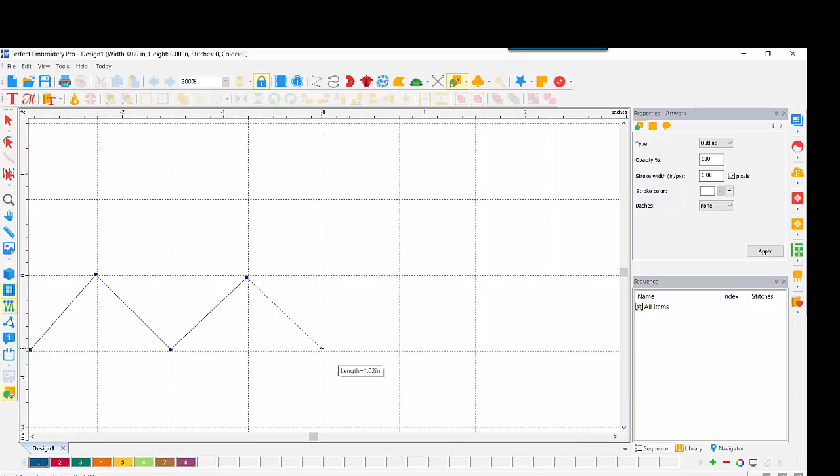With this being February, there are many Valentines and decorations that I've seen with scallops, which got me to thinking, how might we do this in Perfect Embroidery Pro? Certainly, we could bring up our grid, use our artwork tool, and create humps, if you will, that can be turned into our scallops. I'm simply clicking and dragging.

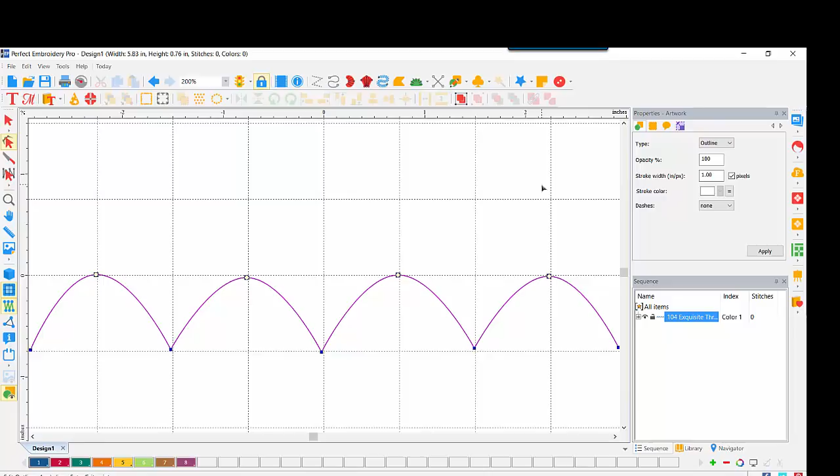Right-click to end. I'll use my shape tool and select all of the tops. Right-click, turn them to smooth, and this gives me the look of a scallop. However, this is rather limiting as the grid points might not be in the proper spot for the shape we are using. Instead, I'd like to show you the process using the Weld tool.

We have three shaping tools found when we right-click on two selected objects. The first that we see here, a blue rectangle and a red circle starting out, those are our shapes. If we select both of them and do a weld, it's going to merge two selected objects together, as you see here in the blue.

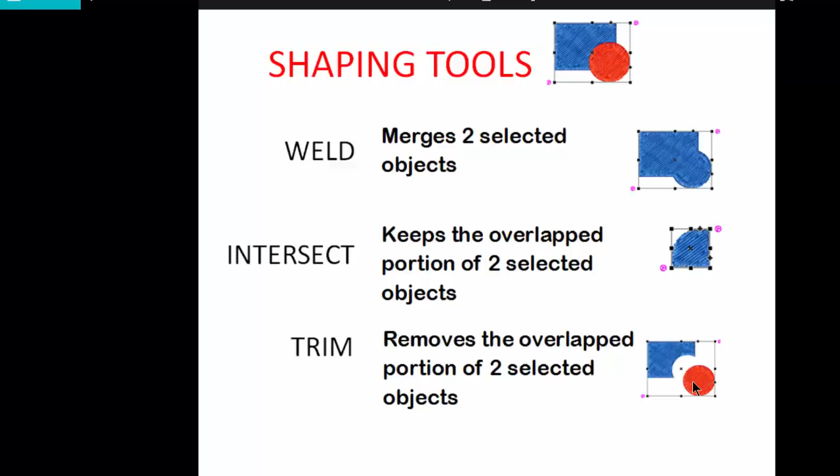If we use the shaping tool called Intersect with those two shapes, it keeps the overlapped portion of the two selected objects. In this case, that inner quadrant of the circle right up here. If we use the Trim shaping tool, it is going to remove the overlapped portion of the two selected objects. You can see in this picture I've dragged the circle away so that we can see the part that has been trimmed. Let's set the stage here with some shapes on the screen.

We're going to create a perfect circle. Come up here to my artwork tool, choose the ellipse. I'm going to hold down the control key on the keyboard as I drag to give me a perfect circle. Selecting it, I want to check out the size. I actually wanted a 0.4, so that was pretty good on my part.

I need a number of them, and yes, I could copy paste, but let me remind you of your repeat tool. With it selected, I'm going to come up here to repeat, click on that. I know that I want 1 across and 5 down. The other thing that I'm going to do here is to use the vertical distance and set this at a negative 0.01. I need these circles to be slightly overlapping. I'll go ahead and do an apply, and I see this overlapping right here, which is what I need. I'll go ahead and OK, and here are my 5 circles brought to screen.

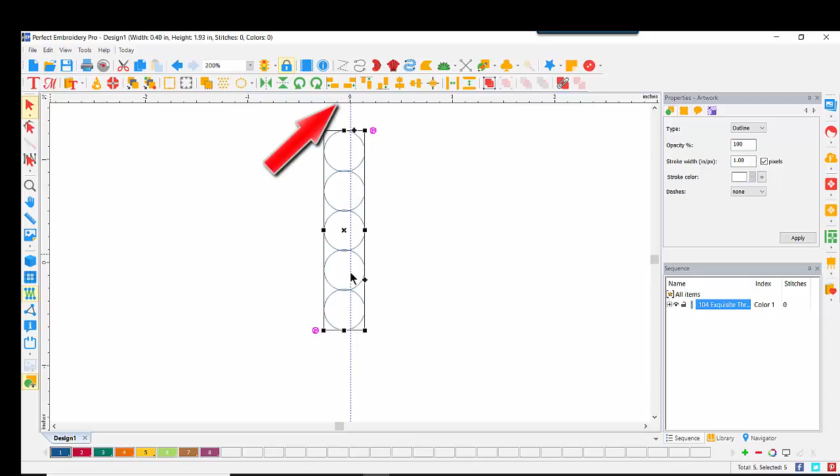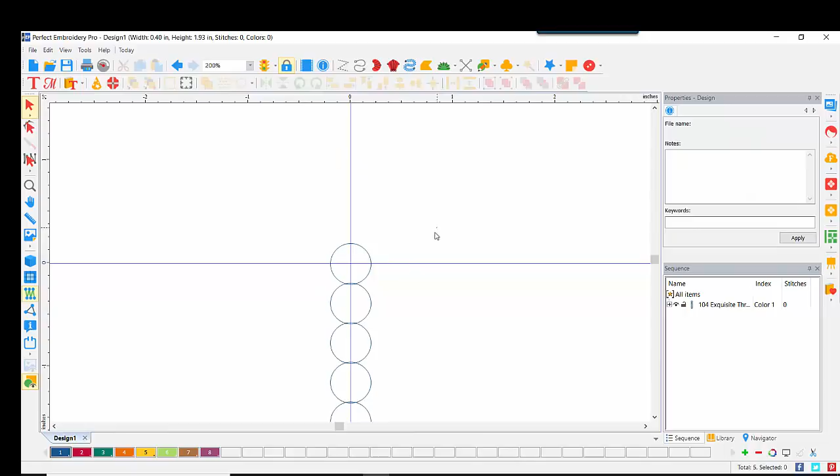The other thing I'm going to do is to come over here to the ruler and click and drag and set a guideline at 0. I'm then going to come to the top ruler, click within the ruler, and drag down another guideline set at 0. My 5 circles are still selected. I'm going to click on those and drag and place them right on the center of that line. I can check my work because each of these circles are still individual circles and artwork, and you see that I have placed the center X in the center of those crosshairs.

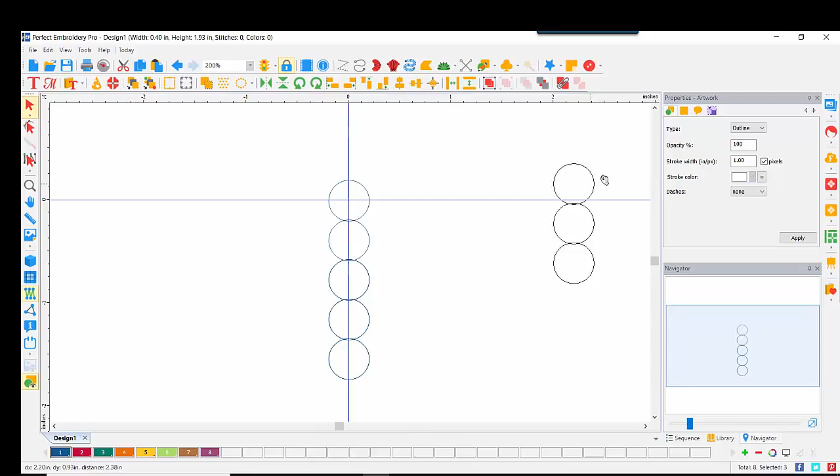Before I move on, I'll come over here and turn the Navigator on, move my blue box down. I want to select the bottom 3 circles, do a copy, paste. I'll drag those over here out of the way. I'll turn those red for right now so that they're a different color. If I need to choose any of my blue circles, I've made it a little easier for myself to do that. And now we're going to start the weld process.

You may remember that to do a weld, we have to have 2 selected objects, not 1, and not 3 or 4, and not all of them. We have to weld 2 objects together. So I'll click on the first item, hold my control key down, click on the second circle, right-click within, come down to Shaping, which gives me the 3 shaping tools. I'll choose Weld, and you can see right here that they have welded together.

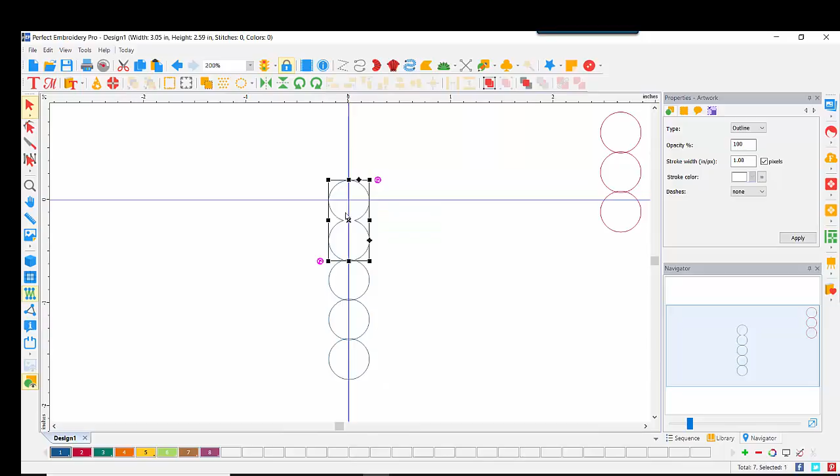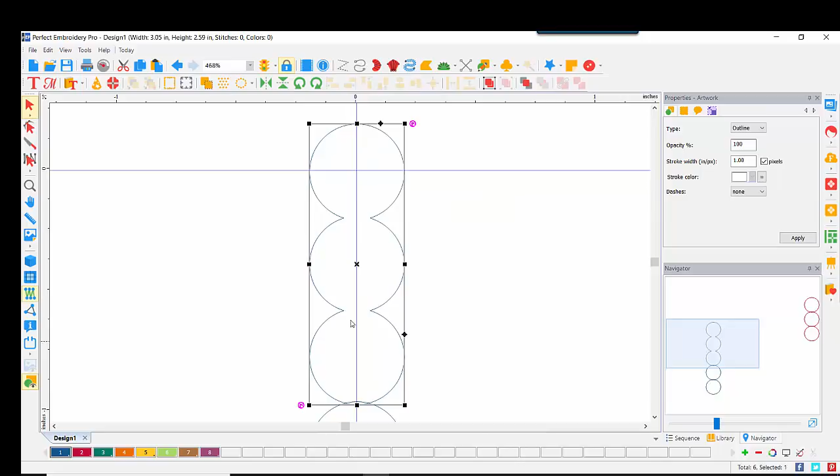If I scroll up a little bit with our Navigator, you can see that those 2 now make 1 unit. All right, that 1 unit is selected. I'll hold down my control key and select my 3rd circle, right-click, Shaping, Weld. Same thing has happened. I might scoot out just a little bit here on my Navigator.

With this selected, I will hold down Control, select my next circle, right-click, Shaping, Weld. Remember, once this is welded together, it's considered one object. So all I need to do then is hold down Control, select the next object, right-click, Shaping, Weld. All of my 5 circles have now been welded together.

I'm now going to click and drag another guideline to come down to the center of this bottom circle. I can tell that it is in the center. The reason I'm doing that is to help with my square. We're going to create scallops around a square, so let's get a rectangle artwork. Once again, if I hold down my Control key while I'm dragging, I'm going to get a perfect shape size, in this case a square.

I'll start up here at the corner of my guidelines, click and drag, and I'm simply dragging down to the bottom guideline. Because I had that Control key held, I know that this is a perfect size square. I'll select it, and I'm going to change the color to green. I use my guidelines a lot to help with accuracy of placement. They're very easy to drag down off the ruler, and you'll see in a moment how very easy they are to remove off of your screen.

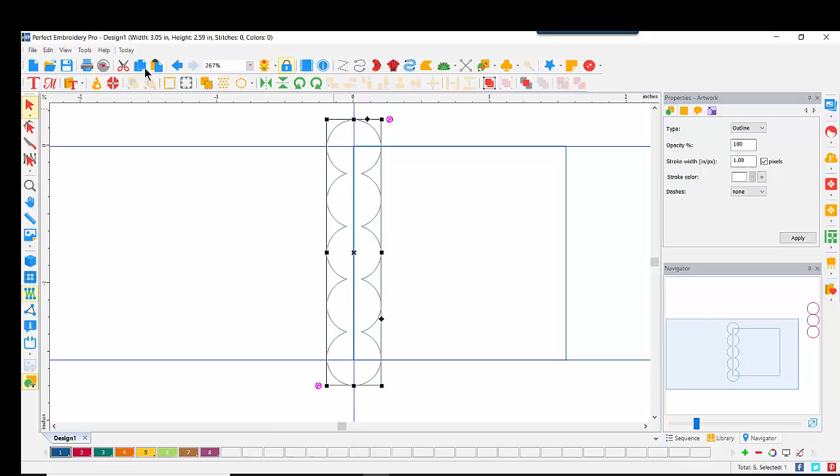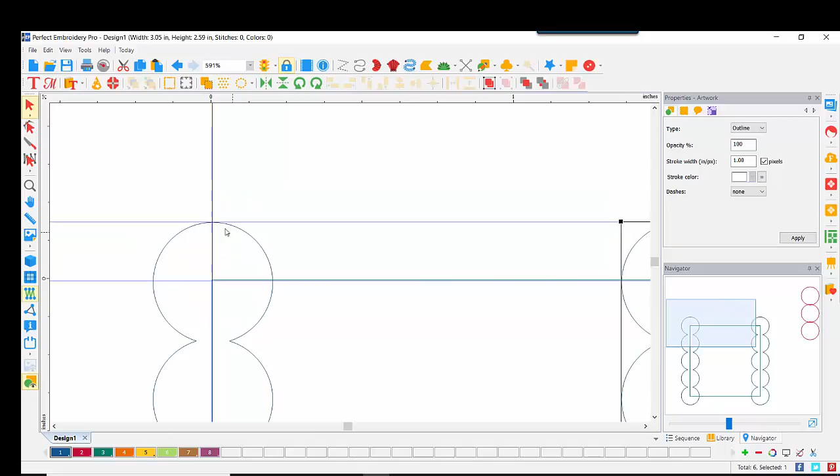My square is selected. Now what I want to do is to select the welded 5 circles, do a copy, paste. I'm going to click and drag and place those over to the side. If I want a little help with placement, I can go ahead and click and drag down another guideline that touches the top of this circle right here. If we need to scroll in a little closer using our navigator, I can see that it touches, so all I need to do then is to make sure that this touches as well, and it does.

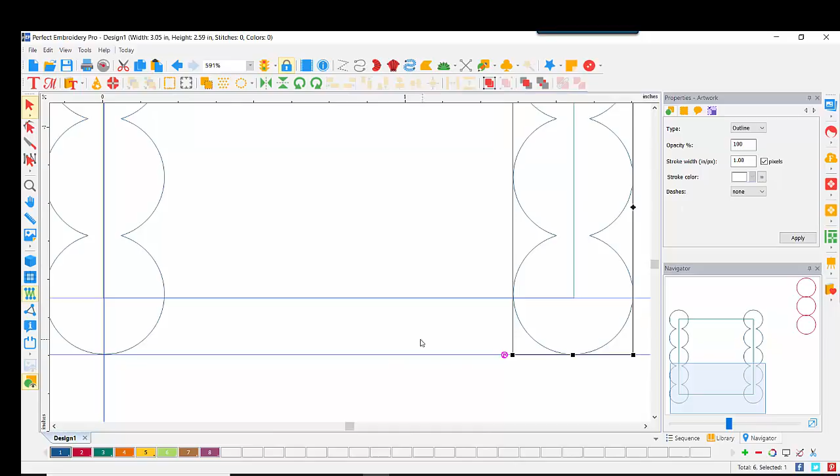Looking to my center point, I'll move down, and if I wanted, I could go ahead and click and drag down another guideline at the bottom to make sure that placement is as it should be. So that looks good. Remember, on our navigator, we can come over here to Fit and click on that, and I will see the entire screen. If I want to make sure they're in perfect placement across from each other, I could also hold down Control and select the second one, come up here to our vertical center align, and click on that.

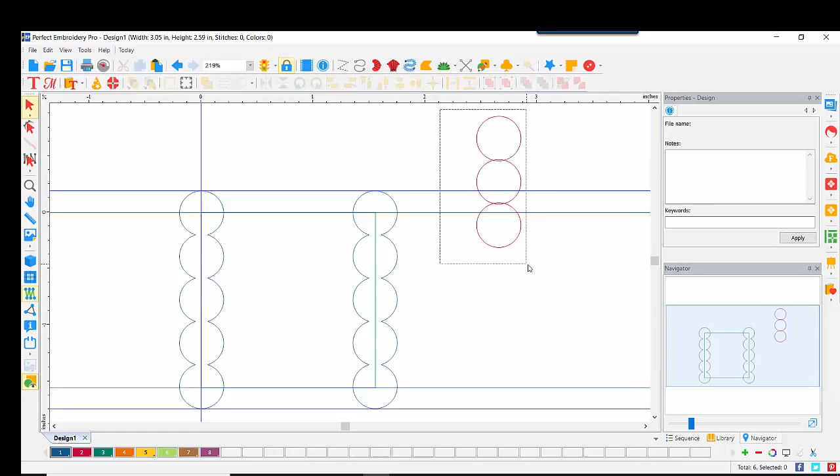Let me now select my 3 circles I've set aside. Come up here to rotate. I'll click once, twice to rotate into a horizontal position. I'm going to place those right in here. And do you see the beauty of that guideline? I have given myself an option as to making it very easy to make sure that those circles are aligned with the other 2 side ones.

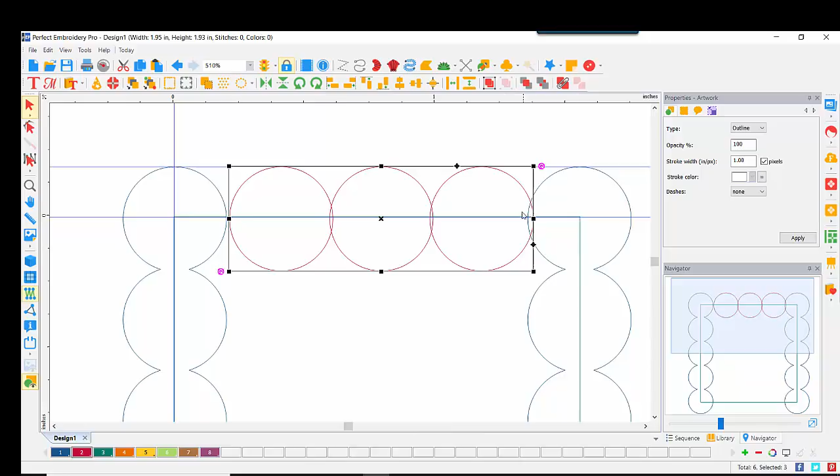The other thing I want to make sure, can you see right here? I need to make sure that they are overlapped. This one on the right hand side is, but this one on the left hand is not. So let me take that and move that over just a little bit and see if they are big enough to overlap. If not, I can grab that side arrow and just move it just a smidge. Remember, they have to be overlapped or at least touching to be able to weld.

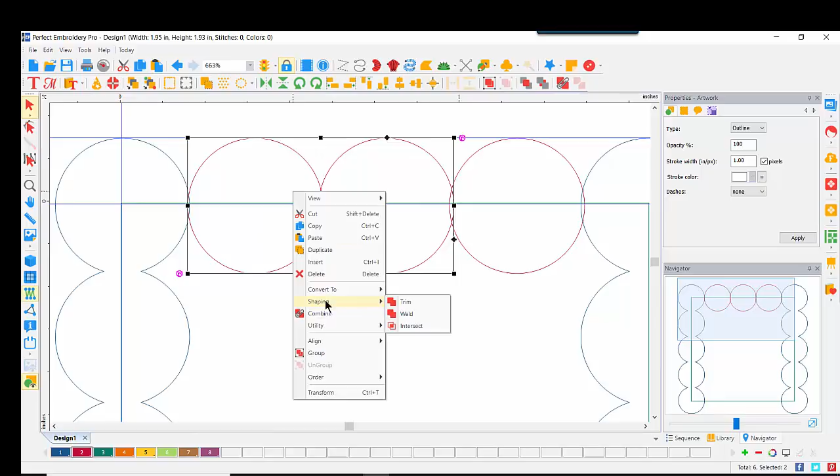Once again, let's start the weld process. I'll click on the first one, hold down Control, click on the second, right-click, Shaping, Weld. This becomes one object. Hold down my Control key, select that third one, right-click, Shaping, Weld. All 3 of those are now welded together into one unit. Let me back out here on our navigator.

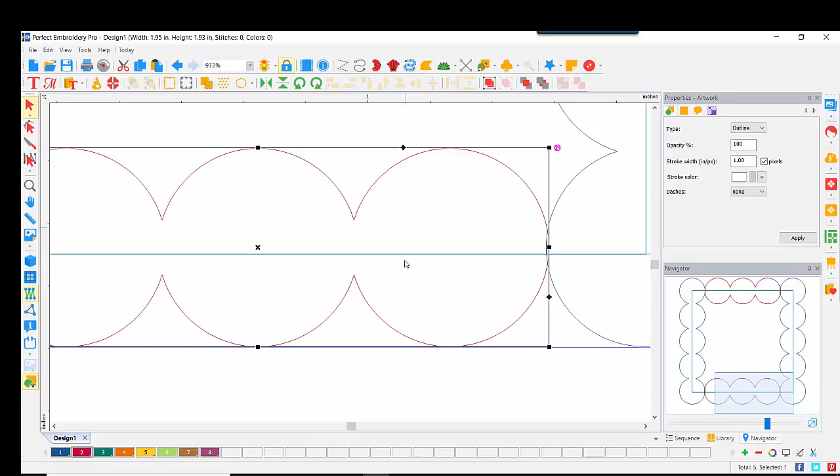I'm going to do a copy-paste on that top circles, drag those down, and once again, because of that guideline, I've given myself a nice way to guarantee placement. Just touching that bottom line, I've overlapped here just a little bit, and if I need to see on that side, I'm overlapped here. So now what we want to do, this is one unit. Remember, the sides are one unit and the top.

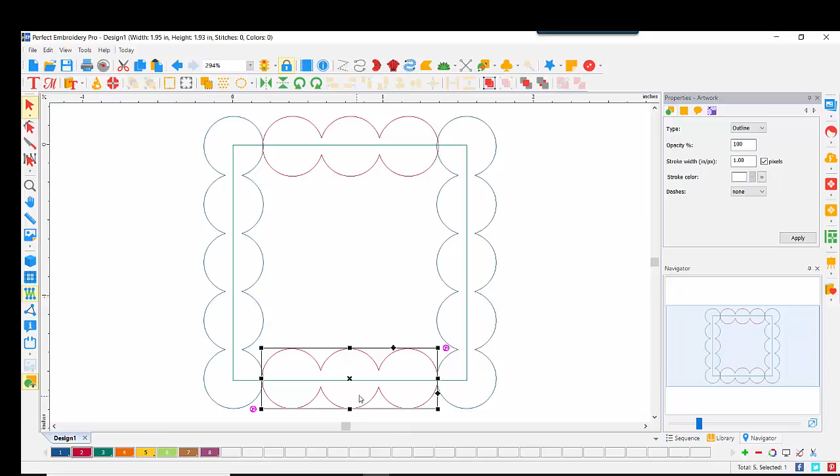To help you see this just a little easier, let me come over here to my ruler, right-click in ruler, remove those guidelines. We just have our square and then the 2 side pieces and the top and bottom. The bottom is selected. I'll hold down Control key and choose the right side. I'll do a right-click, Shaping, Weld. This is all now one unit.

If I select the middle, hold down Control and click the outside, right-click, Shaping, Weld, I now have one unit. You'll notice too that the colors go away. It will always take the color of the major unit that you are welding. With this now one unit, the only one that is left is this one right here. So I'll hold down Control, choose my outside, right-click, Shaping, and Weld. We now have all of our circles welded together and our inside square. Before I go any further, I'm going to save this.

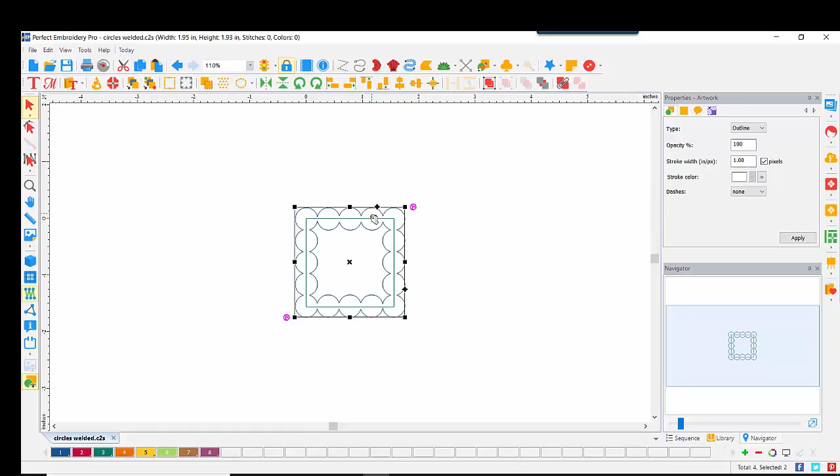So we'll do a File, come down to Save As, make sure it's in the folder that you want. We'll give it a name, Circles Welded, and we'll save that just in case anything needs to be changed from this point forward. I'm going to back out just a little bit here because I'm going to click and drag and do a copy paste of all of these. I'll use my Navigator to scroll out just a little bit so I can see them nicer.

And I want to show you two options that you have for your scallops. We have both of these selected. If you're not sure, come back over to Sequence and we see that we have the circles that are welded and the square that we have drawn. I'll make that red. If I do a right click, shaping, weld, the same thing we've been doing all along, you can see that it merges those two objects into one and we have outside scallops.

If you want inside scallops, let's select both of those items, right click, shaping, and this time we're going to choose intersect. Remember that intersect will keep the overlapped portion of both of those selected objects. Here with the intersect, if I select it and right click, convert to complex fill, you can see that it will fill in those scallops on the inside. I'll go ahead and bump my density down just a little bit.

If I were to select this one, remember this is what we did with weld, and I do a right click, convert to complex fill, it fills the entire unit. It does have scallops on the outside if that's the look that you're after. I'll do an undo, because what if we wanted the scallops to look just like the intersected one, where just the scallops are filled in?

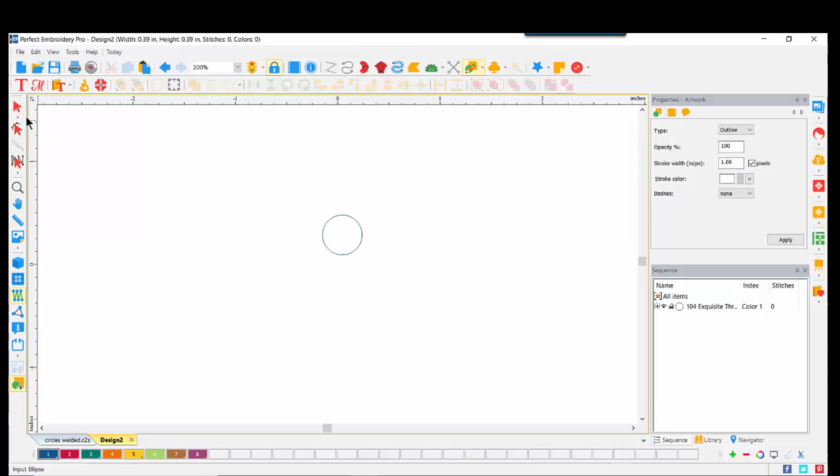Now let's up our game a bit with a more intricate shape. We'll use a heart. Clean screen. We're going to do the same procedure. I'm going to start with my artwork, ellipse, hold Control down and draw a circle. Select it so I can see what size it is over here under Properties. I do want this circle to be a 0.5, so I'll up that just a bit. Apply it.

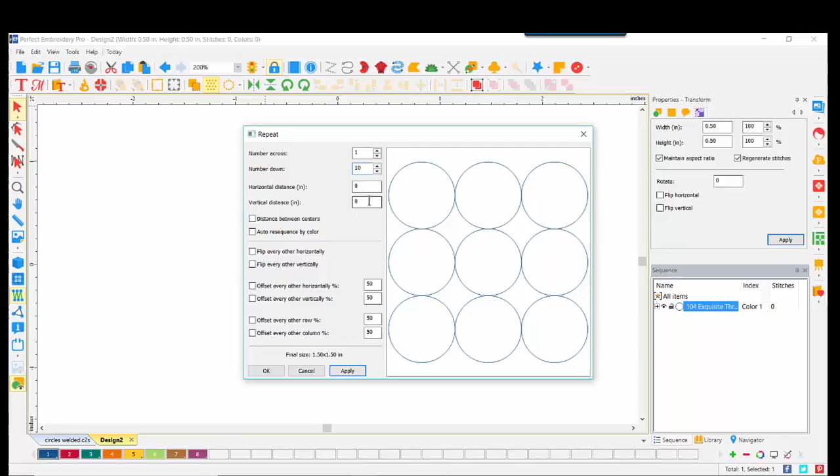We're going to go back into our repeat key. This time I want 1 across and 10 down. I don't need to do the vertical distance overlap in this case because we're going to be placing those circles individually. Here I have 10 of them. I'll go ahead and OK. This was really just a very fast way for me to get 10 even circles without doing a copy paste.

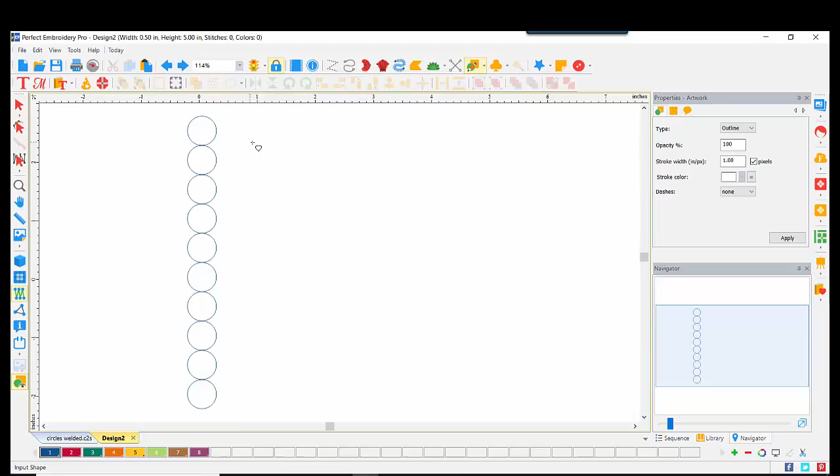Let's come up to our artwork tool, get our heart. I'm going to hold down the Control key and click and drag. That will give me a perfectly shaped heart. I will select it. I'm going to right click on red to change the color. I also need to come over here to transform and set that size to be a 2.8. I'll go ahead and apply. Set that heart in the center of the screen. I'll go ahead and do a right click on the ruler, do a center origin.

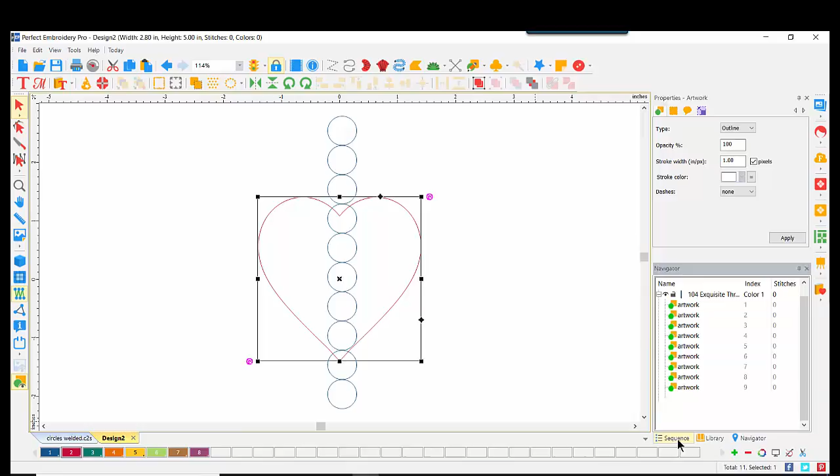I will switch over to sequence view, take those blue circles out of the middle of this heart for just a moment, and then I am going to drag my guidelines down from the ruler, one vertical, one horizontal, and that gives me the center portion of the heart. Remember, these circles are individual. I'm going to click and drag one to place it at that point, and then click and drag one to place it at the bottom point, just for reference. I'm not really concerned right now as to the perfect placement of those circles.

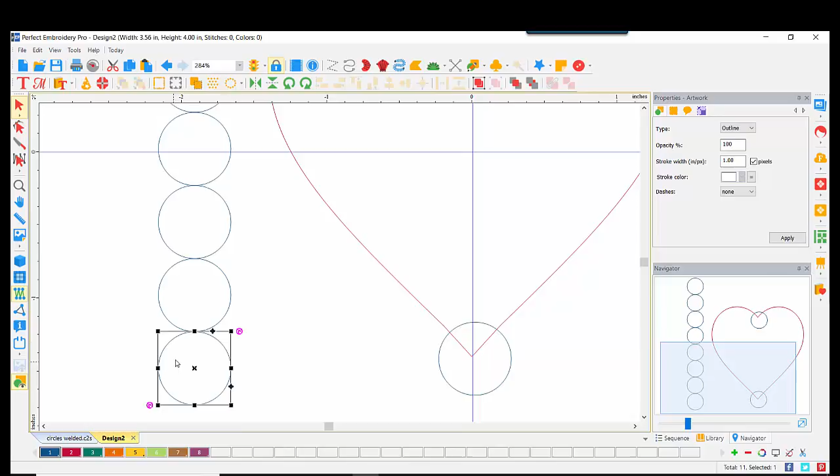Let's come back over to Navigator, bring me back into that screen. I'm going to slide in just a little bit so I can see the circles and my heart a little better. Here's a trick. If we select one of the circles, remember that they are individual, they are not grouped.

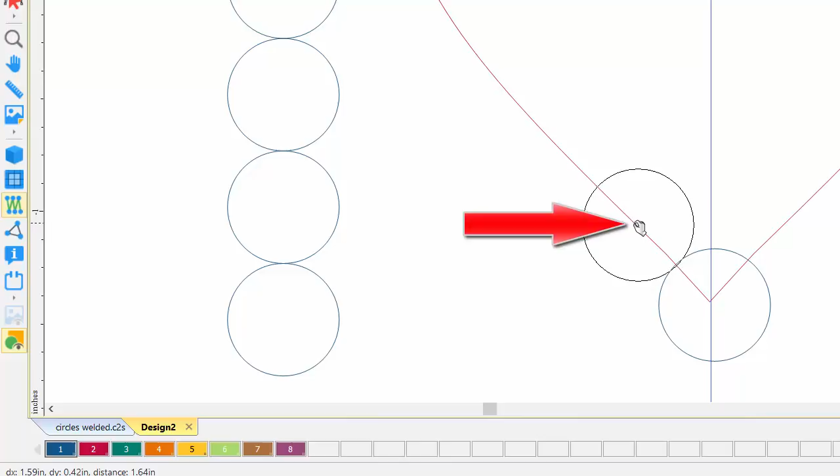You notice that with any selected object, the X always gives you the center mark of that item. I put my hand right on that X, drag my circle over, knowing that that's the center X. If I position my hand on that red line and let go, I have put the center of that circle on the red line of the heart.

So it's very easy for me to place these circles. I'll do the second one, select it first so I can see my X, put my hand on the X, drag over. I'm looking at two things here: first, to make sure I overlap that circle just a little bit, and then that the hand is on the red line of the heart, and I let go.

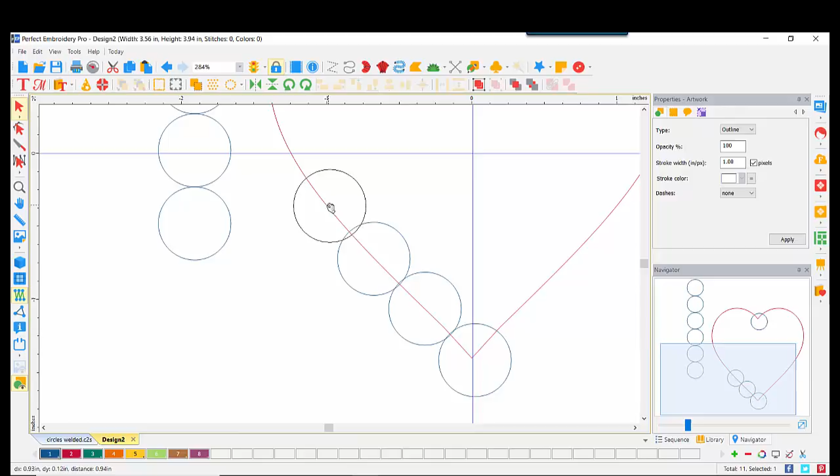That looks good. I'll do the same, select, get that center portion, drag over, overlapping just a hair, watching my hand on that red line. You can use the Navigator to move up, select the next one, get that center point, position it ever so, and I simply keep doing that with my circles.

You can see this is not difficult if I'm using the tools that PEP gives me. Move that over just a hair. I still am overlapped. I want that right on the line there. I'll select the next one, get that center point, overlap them, bring my hand on that red line and drop that into position.

I will select it, get my center X, drag that X right back over on the red line, overlapping just a little bit, and then here is my last one, overlapping just a little bit, getting it on that red line, and there I have the side of the heart.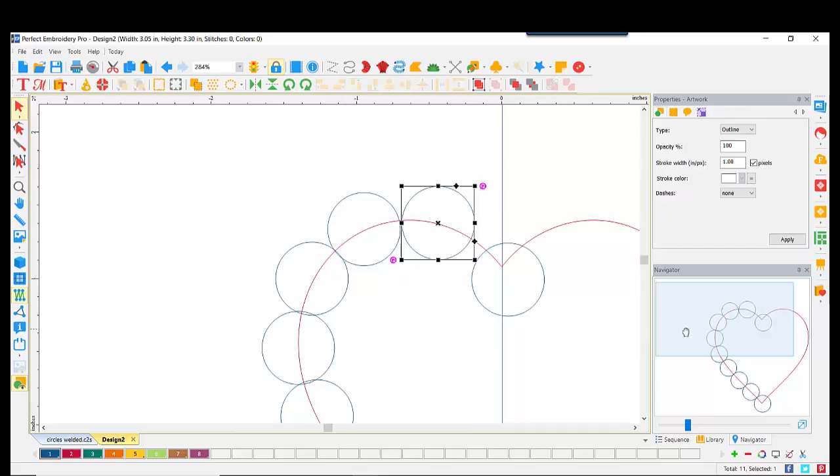I'll drag that out just a little bit, come down here, drag this one out just a little bit, because what we're going to do, if I like the placement of all of these - do you see where that's not overlapped? So I need to move that over again before I go through my procedure.

Because the next thing we're going to do is to weld them. What I'm doing now is taking a look and making sure all of my circles on that heart are overlapped, and they are. So we begin our weld procedure.

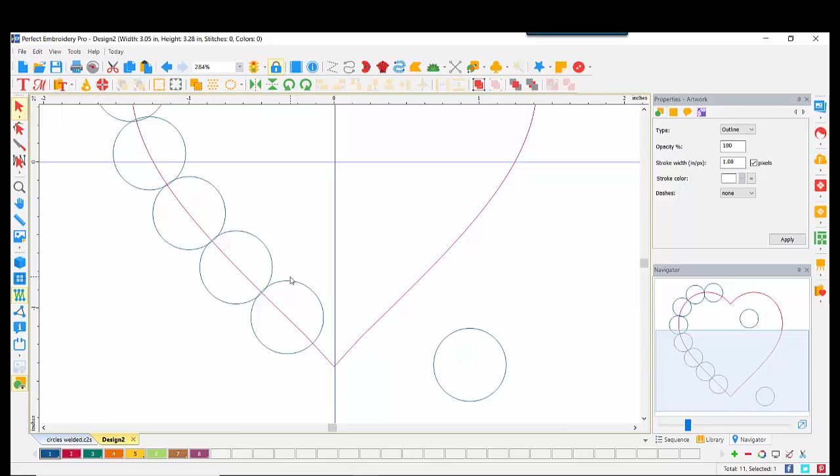I select my first item, hold down Control, choose the second, right click, shaping, weld. This is now one unit. Selected, hold down Control, get the next object, right click, shaping, weld. Move up a little bit here and you can see that all those are being welded.

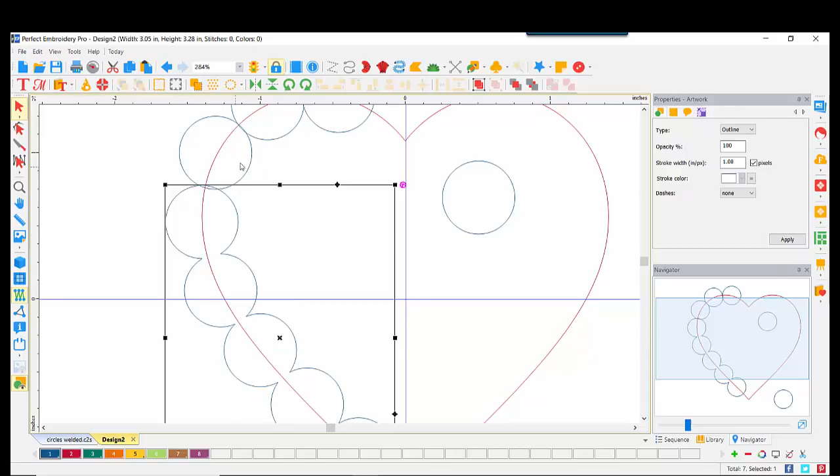Control key, select, right click, shaping, weld. It's the same procedure that we're going to use all along. The right click brings up the shaping. This is now one unit. Holding Control down, I get that next one. Right click, shaping, weld, and so forth.

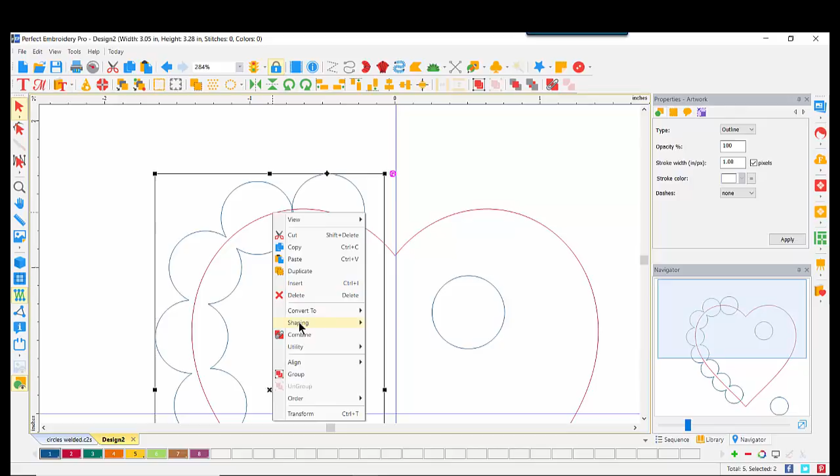I like this Navigator. It's very easy for me to move around without doing a couple of clicks and moving buttons and so forth. Right click, shaping, weld, and then finally the last one, right click, shaping, weld. All of that side now has been welded.

We know that these are going to be the half scallops when we're finished. Let me back out and see the whole of the design. This one item is now selected.

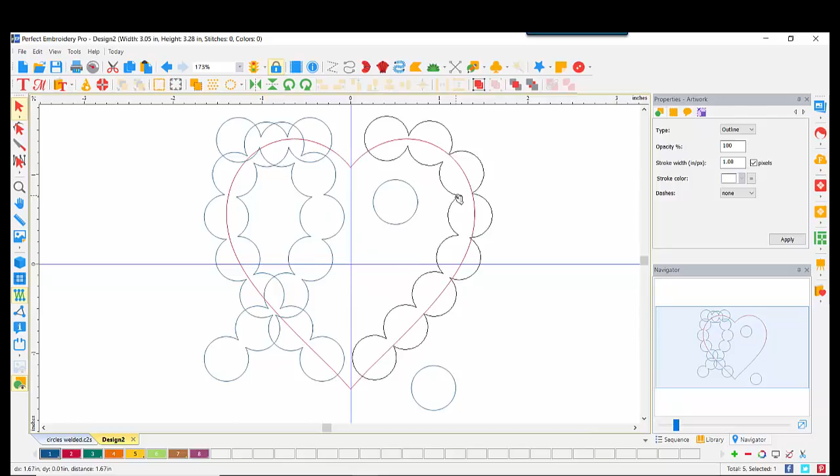Let's do a copy, paste. It's right on top of each other. I'm now going to use my flip horizontal to get the mirror image and then drag that over onto the design and drop that sort of where I think it belongs.

Once again, I'm going to use the tools that I have, coming up to the ruler, dragging down that guideline, putting it at the very top here of this circle. What that does is allows me to get right in. You can see that I'm a little high. I'll drag that down so they match.

I'm also judging the distance from this circle to this one. I know these have to be in the middle, so I can move over just a little bit, perhaps watching that line up at the top. Then if I want to check here, I simply drag the Navigator down to the bottom and drag another guideline down from that ruler, and I see that I'm just a hair off, so I'll come in closer.

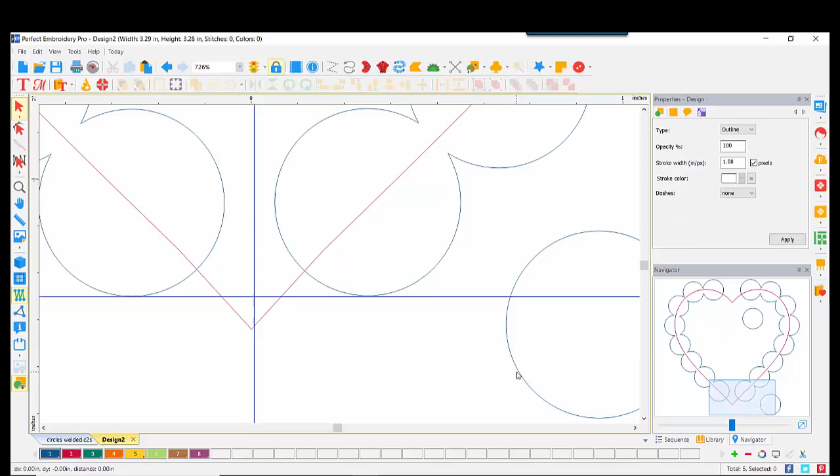Now what I can do is take this bottom circle, drag it over until I'm happy with the shape. I want it to overlap just a hair. And if you're off a bit, either on these two scallops matching or down here at the bottom, not to worry. You can see my center is off just a hair.

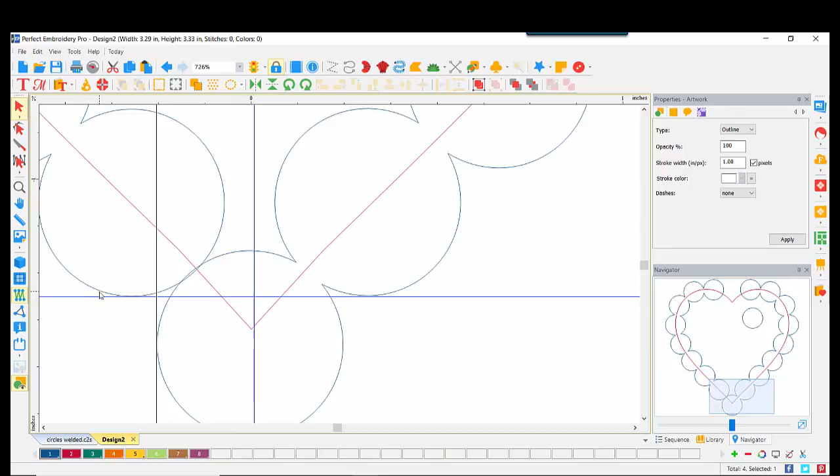Remember, this is scalloped, so if there's a slight difference between them, no one will notice when it stitches out. I have my bottom center selected. I'll hold down control and choose the right hand side, right click, shaping, weld, and I can see that now that bottom circle is part of it.

While I'm here, this is selected. I'll hold control down and choose the other side, right click, shaping, weld, and now both of those sides have been welded to the bottom. Let's go up and do the same for the top. I need to grab this circle and drag it into position. Remember, they need to be overlapping just a hair on both sides for this weld to work. I'm off just a hair, but I'm not going to worry about that.

Let me come out just a little bit so I can see, making sure how many I have selected. I have just this one selected, holding control down. Remember now that both sides are all welded together, that is just one piece. So I can select on that, right click, shaping, weld.

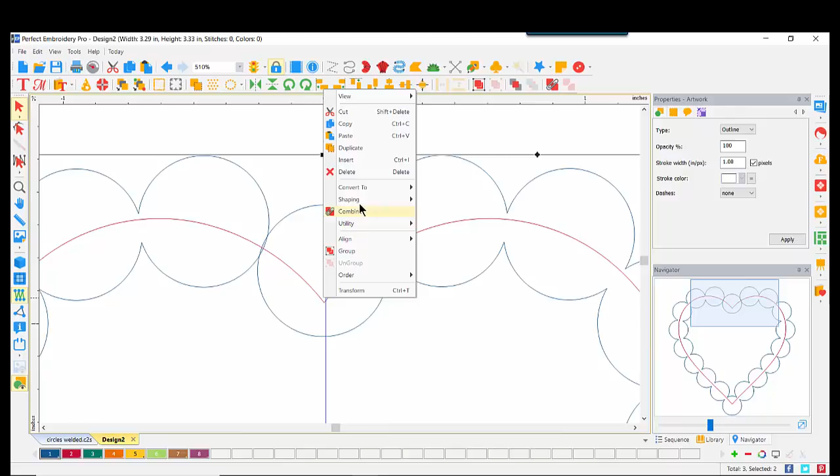We'll back out. Come over here to our ruler, right click on the ruler, remove the guidelines so you can see what we have. I'll back out just a little bit more to 100%.

Both items are selected. I'm going to do a copy paste just to refresh on what we did earlier. Let's move this one over here just a little bit so we can see what we're doing. Both of these items selected, we'll click and drag these items to get our scallop. We do a right click, shaping, weld, and we have the scallops on the outside.

Because I know I'm going to make those scallops on the inside, this red heart is the size that I want. I certainly could draw another one and make it a 2.8, but I'm going to click on just the heart, come over to sequence, and notice I have just the heart. Do a copy, paste, drag that second one over here. I can then select both of those items and do a combine.

We do a right click, convert to complex fill. We have scallops on the outside. While I'm thinking about it, I'll go ahead and bump my density down just a bit. For this other, remember, if we select both, right click, shaping, but this time do intersect.

That's what puts the scallops on the inside. We can do a right click, convert to complex fill. So there you have a weld feature and an intersect, depending if you want the scallops on the outside or the inside. Just for fun, we could select both of those and put them together, and you have that kind of heart. Very pretty. I'll do an undo because we're going to use that red heart in just a moment.

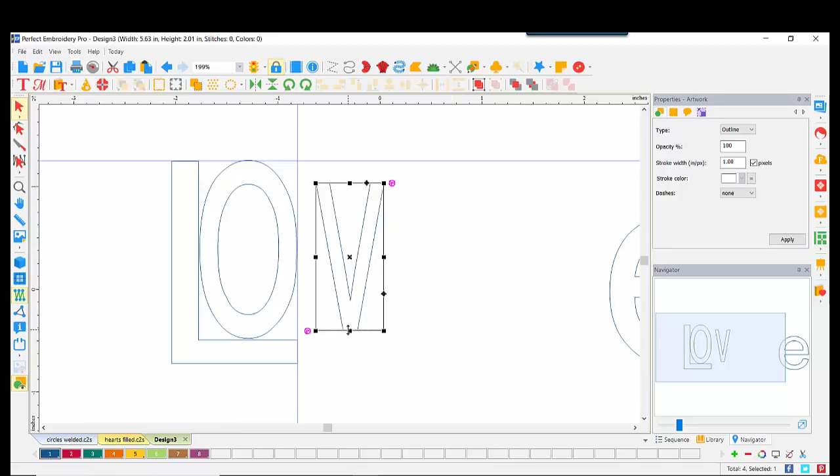I'm going to bring the V in. I know first of all that it needs to be narrower and probably a little shorter, so I'll do some of that manipulation before I bring it over. I'm also making sure that each letter overlaps.

So here we have, before I go any further, let me make sure that O is overlapping just a hair on the sides and bottom to that L. Now with my V, I know that I want it shorter and maybe a little narrower so we get the tops of those V's in.

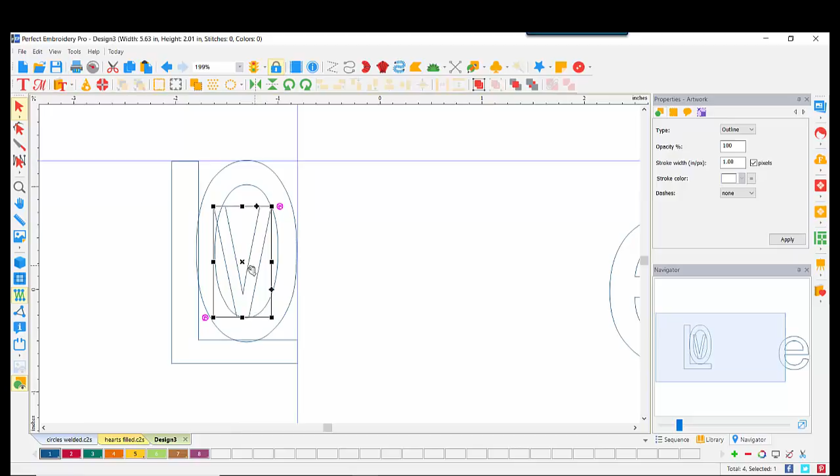And I'm making sure that it's overlapped here at the bottom just a little bit. Let's see what it looks like if I bring it taller. I have a little overlap there on both sides and down at the bottom, so I'm good.

Let's grab that E. This one I might want to scoot in a little closer. I know that this guy has to be a lot smaller, so I will size that proportionately. Bring him over. He's going to sit right inside the top of that. I'm going to size him a little larger now, and there's no right or wrong here.

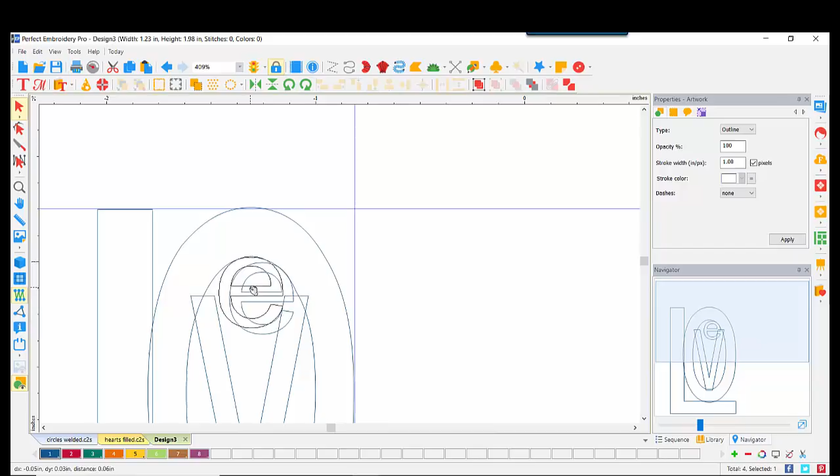I'm just playing, getting those handles, sizing as I need to overlap the top. Maybe make it a little taller, and I know that it's overlapping here and just here by the side. I may or may not want that to overlap because I might want that to define the edge of the E.

With each of them in there, I'm taking a look again, overlap here, here, here, all with the top of the V and the E. I can go ahead and right click on my ruler to remove those guidelines.

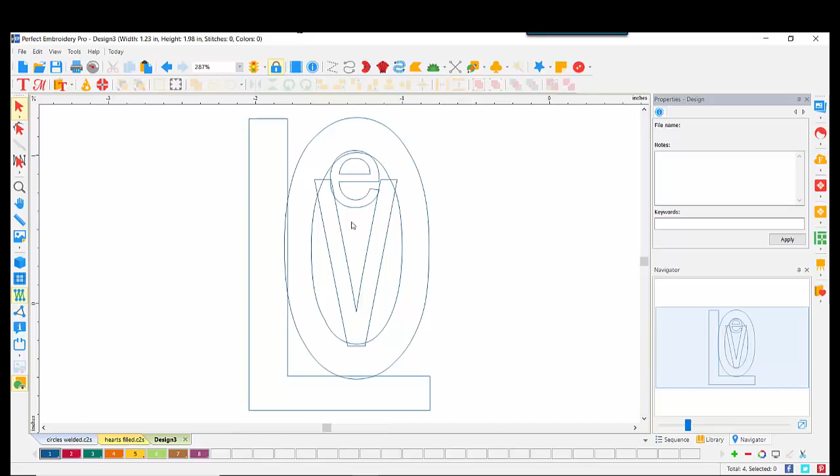And now I'm going to do the weld process. So we'll take the E, hold the control down, choose the V, right click, shaping weld. We see that that's now one unit. Hold my control key down, select the O, right click, shaping weld. That's one unit. And finally then control key, select the L, right click, shaping weld. My word love is all one unit.

I now can do a right click to do a convert to a complex fill. I'll bump that down to a 3 density, come over here and right click on my red, turn on my realistic view, and here we have it set in the tatami.

We could leave that if you like the look of that. I'm going to come over here and play. My two favorites are either brick, I like that, or sometimes I play with corn as well, and I think I like that better. So let's back out just to be maybe 100%, and we can see our word.

This is all one unit. If we want to, we can do a right click, come down to utility, and ask it to create border. Remember the difference between border and outline? Border is also going to give me the lines on the inside of the lettering as well.

Let me change that to a different color so you can see. We'll scroll in just a little bit so you can see that on the inside of all those letters I also have that run stitch. If I had chosen outline, we would only have it on the outside and not on the inside of these letters. All right, here's our word.

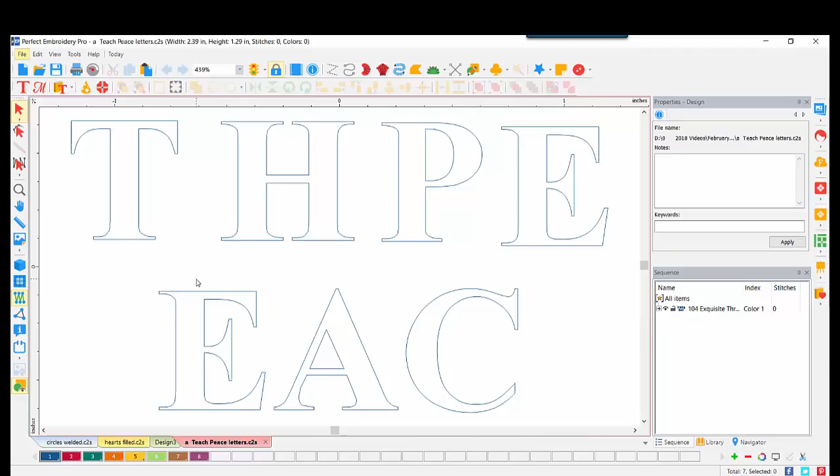We could stop here, but there's a little something for those of you that want a bit more of a challenge, and it's this idea, Teach Peace. We're going to do an open. I already have the letters ready for us on screen to use. These letters were created using your file, import true type text. They are Times New Roman bold. We're going to back out on our screen here to about 200%.

We need to create a rectangle. So I'll use my artwork tool, rectangle, and I will create and drag. Not concerned yet for the size. I'm going to change that in a moment. I am going to do a right click though on the red so we can see both of those things separately. I'll move this down just a little bit. Coming over here to our properties in transform, I want that rectangle to be a 4.5 wide. I'll do an apply. Here's my rectangle. I'm also going to ask it to be center origin.

I'll do a click and drag, positioning those outside of the rectangle for right now. We now want to select these three letters. I'm going to come over to my size and make them 1 inch high. I'll go ahead and apply that. I'm going to drag those into the center. If I want to do this quickly, I can just bring over my center mark, get my X and drag that over, and now I know that they are in the middle. I have these again at 1 inch high, and I'm going to play with the rectangle to give us a slightly different shape. My rectangle is selected.

Come over to the shape tool. I have my points right here on center. I'm going to right click and add a point at that mark. Come down here, right click, add a point at that center mark, and then I'm going to click and drag so that it matches the top of the letter A. You can see what I've done here with this rectangle. I've simply given us an envelope shape. Does this look familiar to you? We have played with this before when we were working with our text tools. However, since I want to reshape the letters themselves, I need the letters to be artwork.

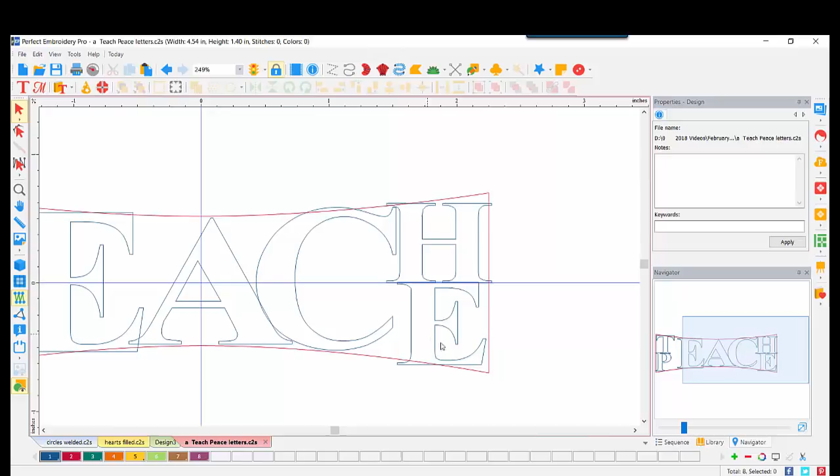So now that I have all of my letters touching and placed, it is now that I'm going to do the distortion of the letters, filling out this rectangle. So we'll select it. I'm going to use my shape key, take those points, and you can see what I'm doing here now. I'm going to, oops, I've grabbed the wrong one there. I'm going to make those points lay right on the line here.

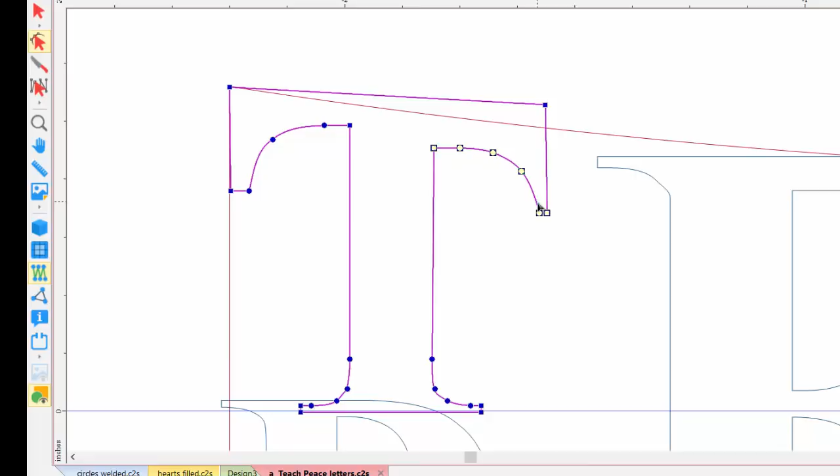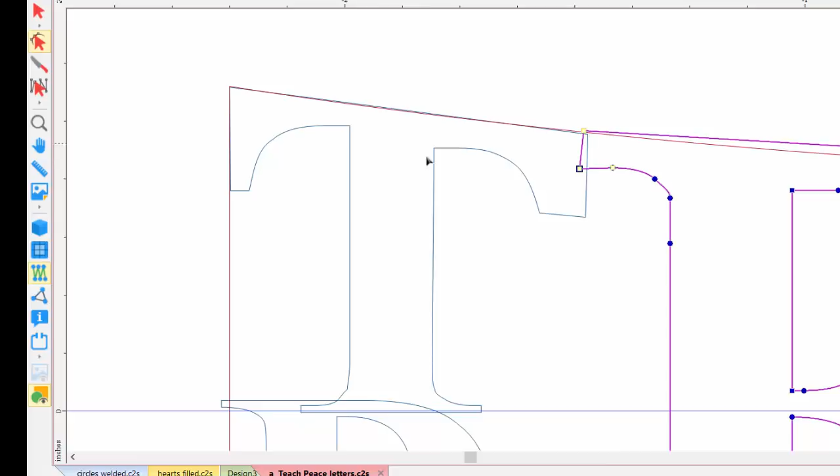And what I can do with this T, I'm going to grab just those lower ones and drag that down just a bit. Because I have selected all of that, I am keeping the shape of the T so that I can bring that T all the way over here and maybe make it a little wider so that when I play with my E, I can drag him over so they touch. You see what I have done there? Okay, I'm making each letter overlap, and I'm trying to keep the proportion of the letter itself.

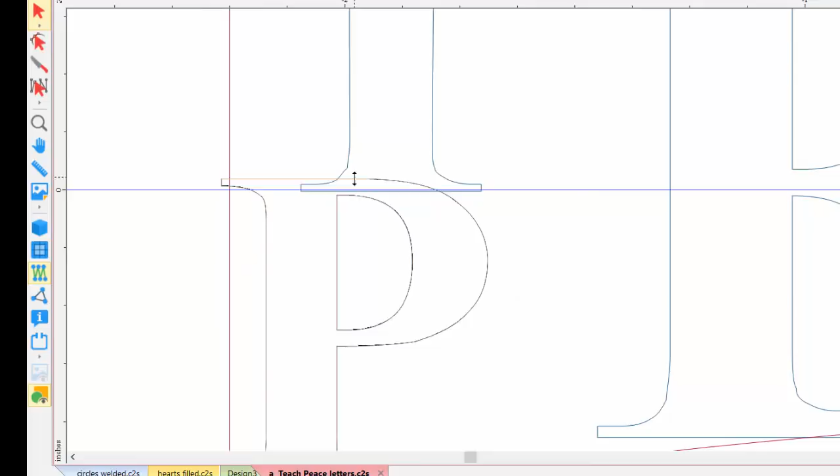If this is a little low and I want this to be as low as the other, I simply select those and drag those down. Again, I want them overlapping. I'll come down here with my P. The P is just a little too tall. I don't need it to overlap that much, so I'm going to come down just a bit. Something else I think I want to do with the T, and I think I'm going to zoom in on this just a bit better to see if I can get the points that I want.

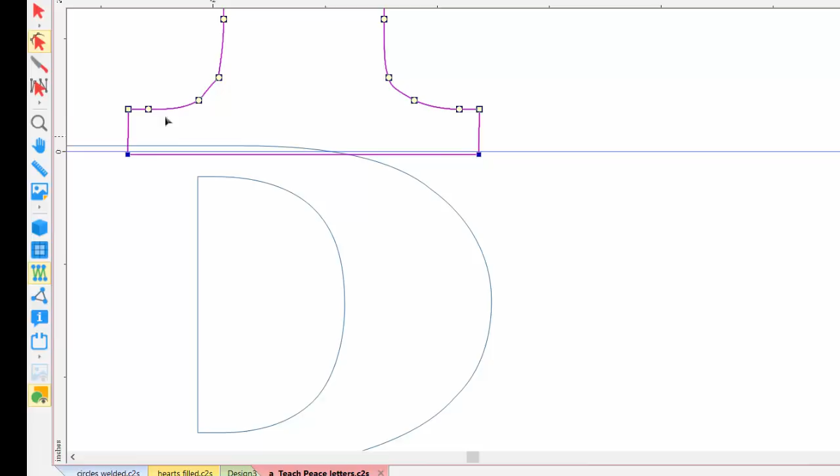I just want this upper level of points, not those two bottom ones. So I have selected all of those. I'm going to drag straight up so that I have increased the depth of the bottom of this T, if you saw what I did just there. All right, let's back out just a little bit here. I don't need to be so close.

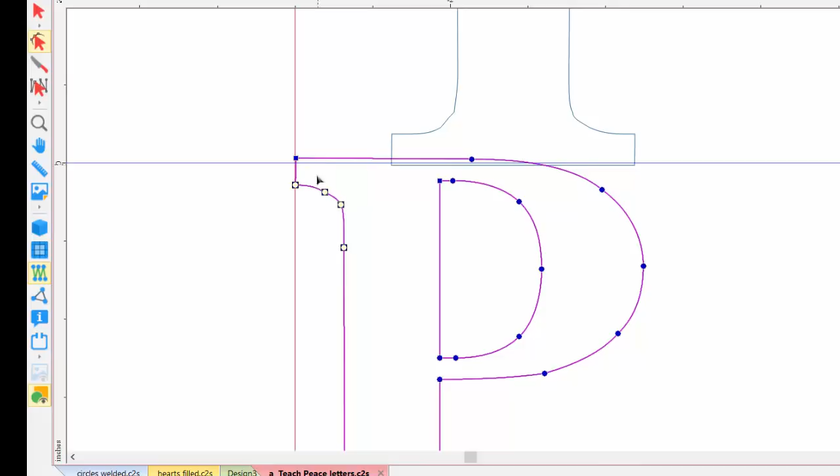With this P, I'm going to take my 2 points, bring them back here, and then I think I am going to do that same trick again where I grab all of these and drag down just a bit. I want that bar here to be a little thicker proportionately. That overlaps. That's going to look good. Let me see what I have down here at the bottom.

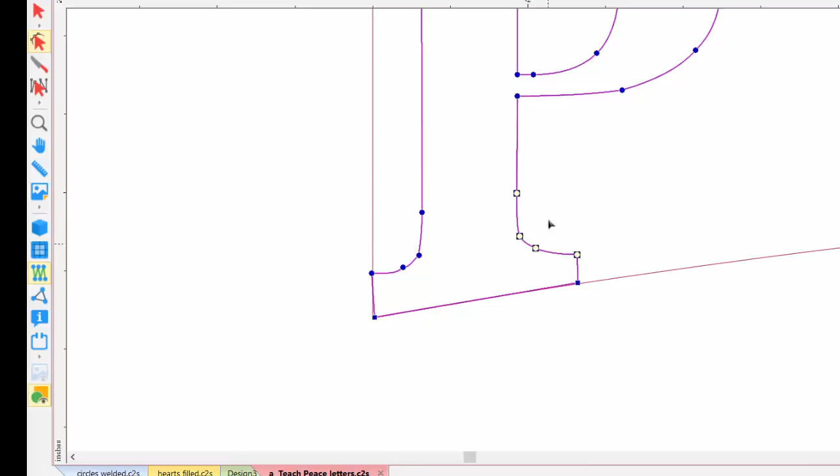In this instance, I can take that point, put it back on my line, take this point, and shape it according to the rectangle. If I wanted that bar to be a little bigger, the trick there is I'm getting all of those points and I just move straight up so that the shape of the letter is as it should be. My E becomes a little easier.

I simply take that point and drag it out if I want that to be a little longer, and then this point matches the red of the rectangle. If you need to add another point, simply right click, drag that point up so that it takes the shape of that rectangle. Again, I'm moving over for my E.

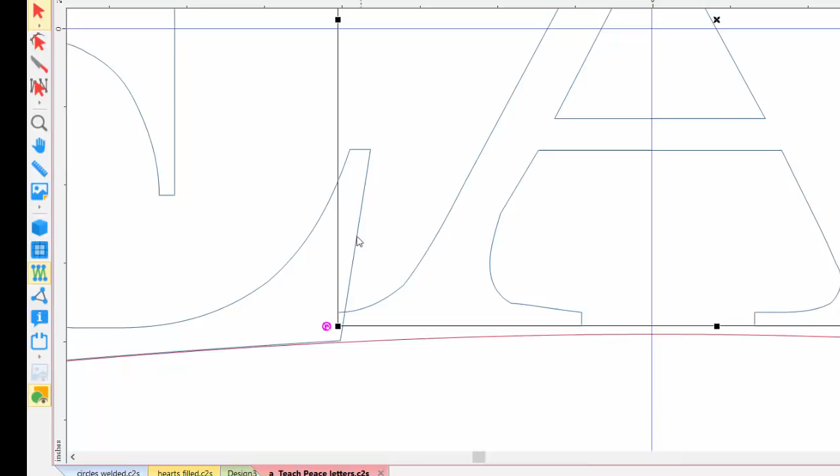Now the A, I think what I'm going to do is select that A and then move it over just a little bit. I don't need all of that bar touching because the more bar is over here, the more I lose that arc. I'll go back into the shape tool and drag the bottom to match the shape of the red rectangle that we have, that envelope shape.

I'll continue to use the Navigator to move over. You can see what we're doing here. I don't think I need another point, but I think I'll leave that as it is. That might be interesting when it stitches out. Here's my letter E. I will select it and make it not quite as tall.

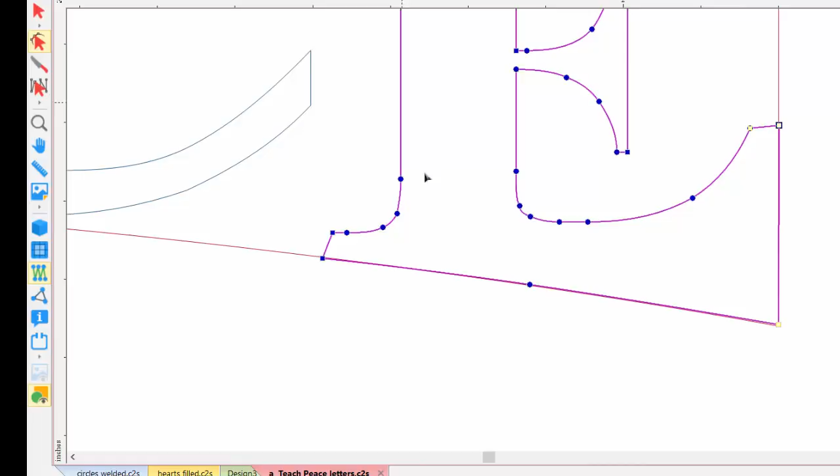I'll bring that up here just a little bit so that I can get my points and increase the bar of that E. I know it has to fit over here anyway, and then if I need that extra point to get that arc a little bit, I can do that. Bring that point over to the E. Once again, what we're doing here is we're making the letters fit the shape of this envelope that we have given. Let's see what I want to do here with the H.

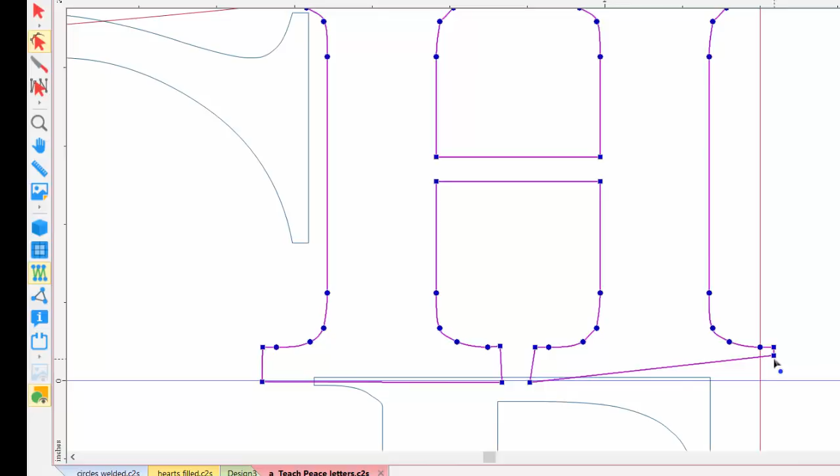Perhaps select it and make it a little shorter so that it's easier for me to bring down these bottom bars of the H. Grabbed the wrong one there. I want them to overlap just a hair, so I'm making sure I do that as well. And then this is going to grab the wrong one, so let's do the undo and grab that one here, and I can delete that point for the arc. It's not needed.

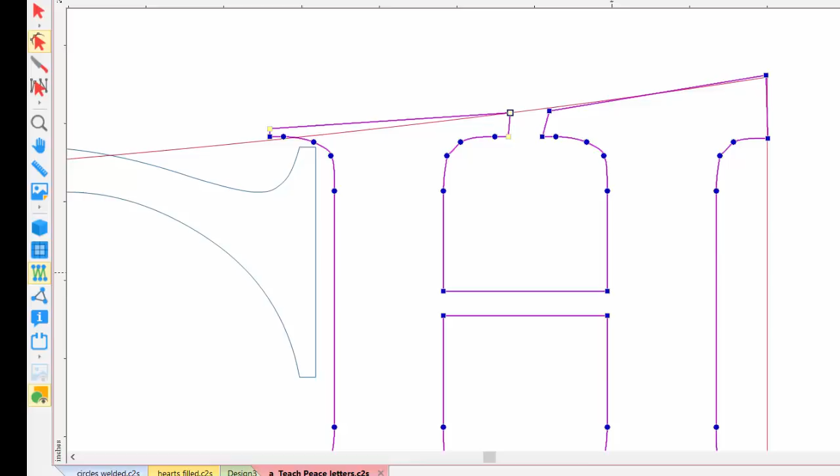This one I made a little wobbly there, and now let's go up and see what I have here. I'll take this point, drag it up to the top. I'm going to delete that point as I just did at the bottom, drag these shapes, and you can see what we're doing. Once again, grabbing the points necessary to make the arc. Now, in this instance right here, I do not have the C touching the H at the moment. I'm going to zoom in even closer for you to see that.

So what I'm going to do is select these bottom points all at once, and keeping the proportion, I'm dragging that down so that it overlaps the C, and when I do that, it's not quite as thick. That one looks a little off straight. Okay, bring that up just a little bit. And again, you can play with these as much as you want. Now I have the H overlapping the C.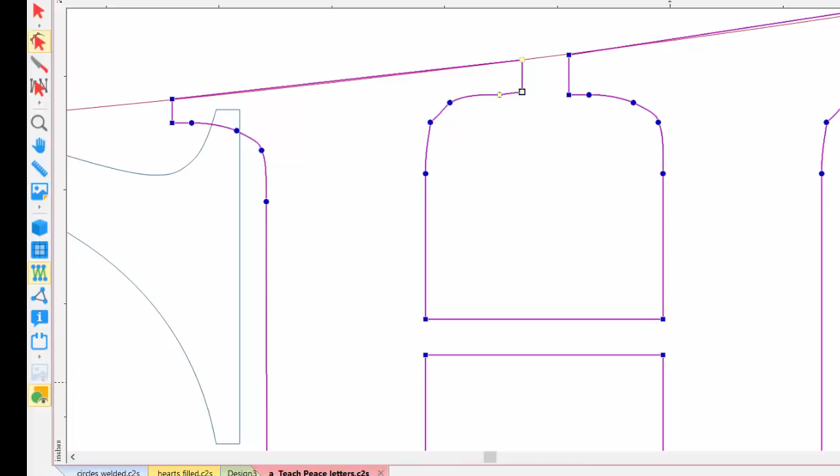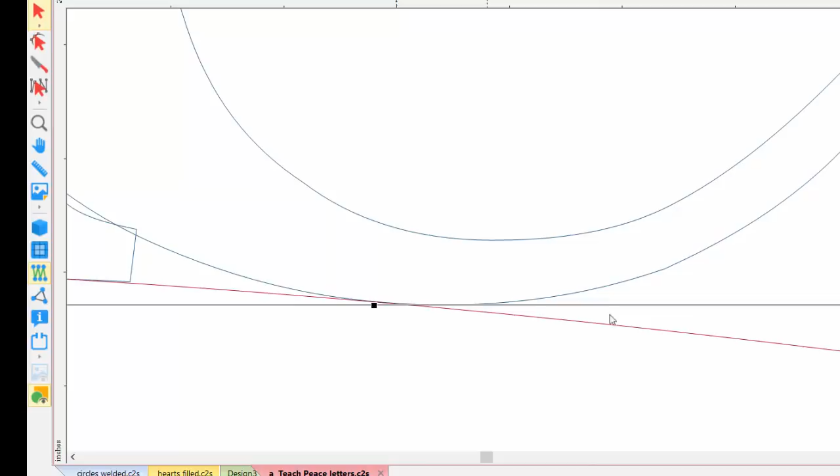I'm going to move my bar here. This C is a little bit too high, I'll select it, drag the whole thing down just a bit, because remember, that keeps it proportional. Let me real quick look at the bottom. Did I bring that out of proportion here? I'm going to drag that down to my bottom. I'm overlapped and so forth. Again, let me check my top.

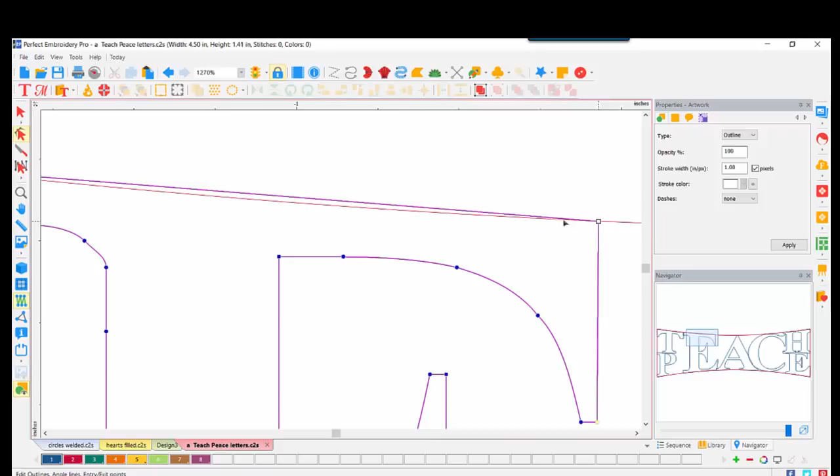That looks good. The A needs to come up to intersect that top line. So I'll drag both of those points up using my Navigator. I see my E has come out just a bit when I change the size. Not a problem at all. I simply come over here. I probably want an extra point in there. Smooth that out a bit. Move over, check my E and my T.

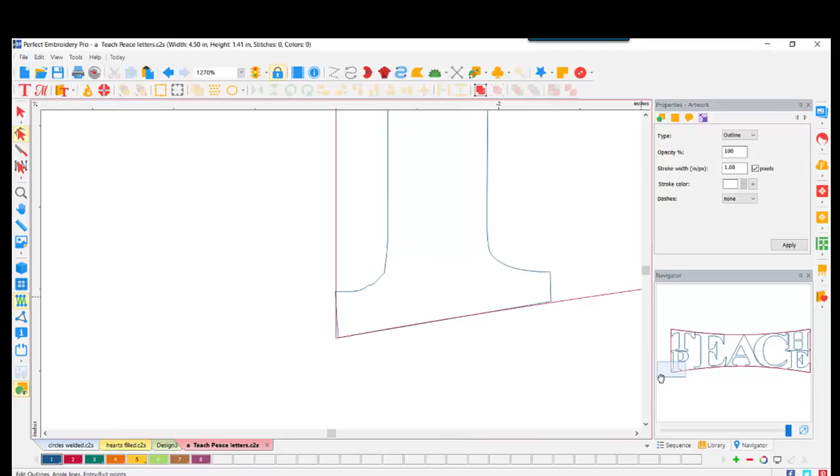And this does not matter because they're overlapped and they're going to weld together. I'll change that. And again, all I'm doing is one last moving around on the Navigator to make sure that I have my points the way that I want them. If that's a little wonky, I can smooth those out if I want to. And this is the great thing about the Navigator. I love it. It's like the pan tool and the zoom tool turned into one very useful tool.

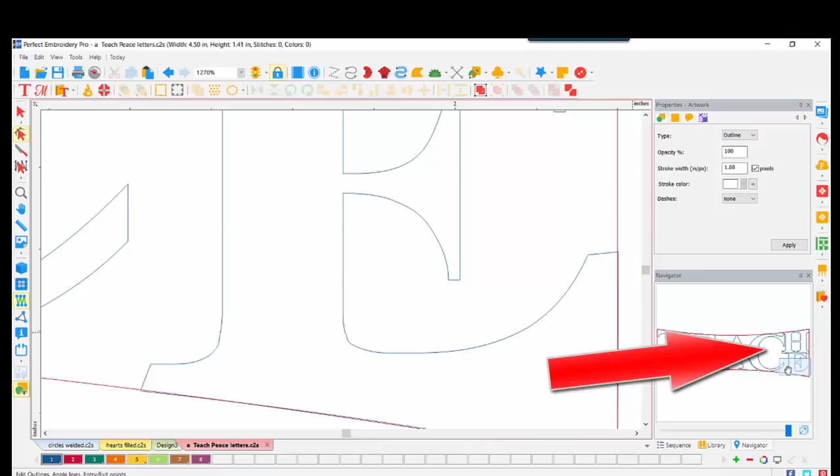Again, you're watching over here where I'm moving this blue, and I'm simply checking all my parts of my design to make sure that they are within that red rectangle. And again, if I feel like I need a little bit of a smooth arc, I can add that point. All right, let's back out. We have all of this put together. Certainly, having spent time on that, I'm going to do a file save as. I'll just call it teach because I have some other ones in there with different names.

At this point, we would go through our weld process. The H is selected. Control, select the E, right click, shaping, weld. Control, right click, shaping, weld. Control, right click, shaping, weld. And I continue to do this across the letters themselves, and just as we've played with all along, each of those letters are being welded because I had them touching.

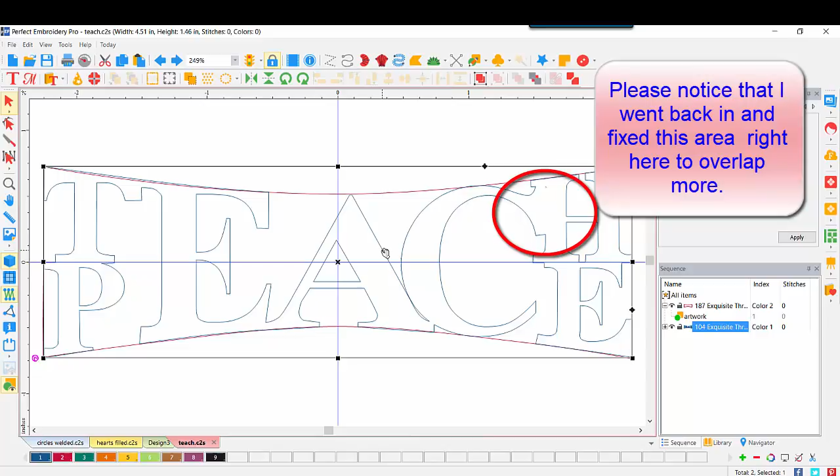Let's select all of our welded letters together. Right click, convert to, complex fill. Everything fills in very nicely. Let's do a change in the density. We also could come up here. I'm going to go ahead and turn that red. We can come up here and change the pattern. Again, my favorites are either a brick or a cord. That looks pretty good. I'll try my cord here. You certainly could pick either choice that you like. I happen to like that a lot.

Our last step is to get the framing around it. I will go ahead and select the artwork, do a right click, come down to utility. I'm going to create an outline for it. The default of 0.08 is fine. I'll okay that. I now want to select both of those, holding the control key down, the inside and the outside lines. To be able to fill that, we have to first come up and do a combine. Now a right click, convert to complex fill. I'll play with my density, and I like the look of that.

If we want to change the corners, you can see how they're a little bit rounded. If you like that look, fine. If not, this is what I would do to fix it. I'd use my Navigator, come in quite a bit here on the sides, come out just a little bit so I can see it better. And I would drag a vertical and horizontal guideline so that I knew where that corner should be. I have the two set right here.